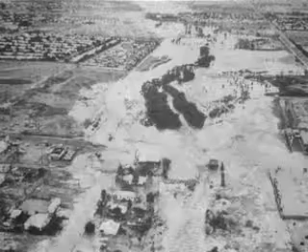In the late 1960s, the Army Corps of Engineers were called in to help mitigate the water issue here in Scottsdale. What they proposed was analogous to the LA River, if you're familiar with that in Los Angeles, the Terminator 2 movies, etc. — a large concrete basin that would run the 22 miles of Scottsdale. Imagine how devastating that would be to the civic environment of the city.

In a kind of incredible moment of enlightenment, the city convinced the Army Corps of Engineers that that was a bad idea and decided that a park would be a better idea. This was one of the first projects of its type in the country — a linear park, an 11-mile linear park, about half the distance.

Scottsdale is a north-south city, a long linear city. This park became an amenity for the city, but it was not just an amenity. As you can see in the image, just below the flood image, is a contemporary flood and how that water is managed. So ostensibly what you have is an amenity that becomes an infrastructure.

This notion of amenity infrastructure is a thread that comes through the work I'm going to show you tonight. Here's a contemporary image of the park, and you can see the variety of different uses that it currently affords.

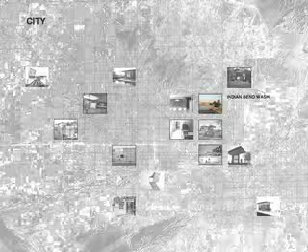So from Indian Bend Park, I'm going to talk about the first project, which is entitled Stripscape. This was a project that was completed in 2004. It's really probably the most intensive project I've ever done. It might not look like much — I'm still a fairly young architect — but let's just say there were 60 presentations given for this project.

The project had a series of stakeholders. This is partly why it was so intensive. The councilman, Phil Gordon, who is now the mayor of Phoenix, was a councilman for the district where we started the project.

In 1998, the 7th Avenue merchants along this north-south corridor formed a merchants association. They came to the city and said, hey, we've got a hardship here — you widened the street in 1965, and our businesses are not doing well. We don't know, you need to do something to help us. We're not sure if we can survive, etc.

And this part of the city was not in any way on the map for the mayor, for any of the municipalities. So the project was a collaboration between these various street departments.

We began — they came to the university at the time, and the city said, could you help us? My research at the time was looking at these commercial corridors as a typology in post-war American cities. I said, sure, that'd be great. Let's try and do this project.

So, of course, I began with a theoretical construct. This image on your right is a picture of 7th Avenue. You can see it's a cacophony of signage and businesses. It's really a 1950s strip, not unlike most commercial strips you see around the country. One of the things that's unique about this strip is that it is predominantly mom and pop shops — except for a Circle K on the corner at the entrance of this one mile stretch, everything else is not a corporation.

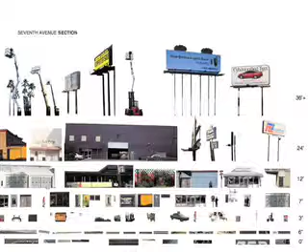The other way was to look at it in section. One of the things we discovered here was that at about 12 to 14 feet, there was a datum that was starting to occur in the site. That datum was really a result of many of these post-war buildings, their type of construction, and where their signage was occurring. So we started to find some threads that began to link this project together.

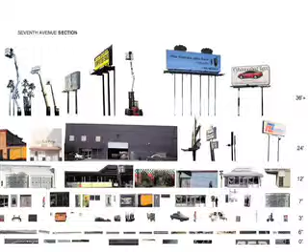So the main thesis, if you will, was to try to take this consumptive landscape and try to make it more productive and more pedestrian friendly, and serve both the merchants and the neighborhood, and really create an identity for the area to help with its revitalization.

So obviously billboards are completely consumptive, and shade is an amenity, and it is really something that's worth something in a city like Phoenix. So the thesis here was, could you turn signage into a shading device? And if you could, what were the possibilities of a city full of shade signs?

And also the visual litter of the site was quite complex, and the idea was to try to reduce that by absorbing car shaded shelters, pedestrian lighting, and signage.

One of the things about Arizona is that the sun, after about 2:30, gets low in the sky, and when it's low in the sky, a horizontal shade isn't going to do anything for you—it's really the vertical shade you have to start thinking about. In fact, it's the most complex situation to deal with in a city like Phoenix because the sun is so hot.

So taking a page from the bus shelters that exist there, these kind of vertical screens, and then monument signage, we started a new public art program that created art panels that could be used to shade areas of the site, but also every 6 months the art changes.

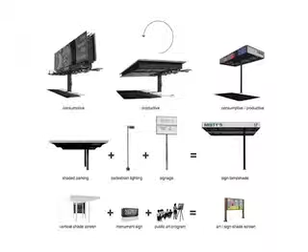Some of the details of the canopy we developed—we call it the lampshade. It's an 8-inch steel pole, just Corten steel. It's rusted, so if it gets tagged, we can brush it. There's a custom aluminum extrusion we designed for the canopy so we could hide all the fasteners, and then an aluminum light box that's cantilevered off of this.

There's an interesting story. When I began the project with the city streets department, the canopies had 4 legs, then at about 60% set they had 3 legs, then 2 legs, then 1 leg. They literally laughed at me when I showed them it only had 1 leg. The intention was to get things out of the way of the automobiles that were there, but also to be as efficient as possible.

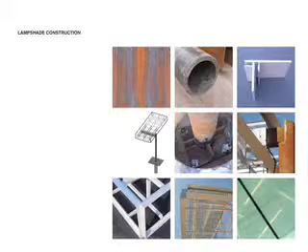So what we did is we convinced the city to build a prototype to test it. My firm was part of a show at the Scottsdale Museum of Contemporary Art called Southwest Net, and as part of the show, we built the prototype.

We're in good company—this is a Will Bruder building, and that glass wall is a prismatic glass wall by Jamie Carpenter. So it was very modest for us to be there, humbling, I should say, to be there.

And so we call it a lampshade. It's a shading device at night—this is an actual bus stop in front of the museum, and at night it illuminates and becomes a lamp.

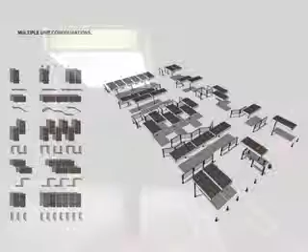So with the multiple unit configurations, you combine the art panels with the lampshades, and you can have everything from a bus shelter to a shaded arcade to a marketplace, et cetera. The idea was that this constellation of pieces could be multiplied throughout the site and begin to create an identity for the area, but also become a programmatic amenity for the merchants.

We took photographs of things we looked at and began to imagine how the merchants could appropriate these for their outdoor display, cafes. There are a lot of automotive mechanics there that deal with classic cars, so how could they display those there?

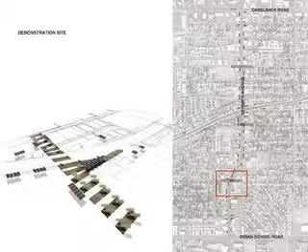We decided that rather than sprinkle the project over the full 1-mile corridor, we would look at just one site and try to have the most impact. And then if that was successful, we would take it north.

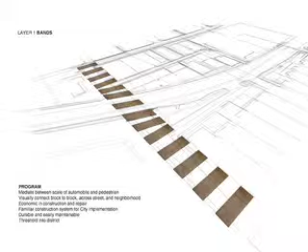The project is composed of a set of elements. The first layer, if you will, are the bands—20-foot by 60-foot concrete, stained concrete bands that come across the street. Scottsdale Road, 7th Avenue is right here, this is Heatherbrae, a cross street into the neighborhoods. So the bands mark the scale of the automobile, and they connect both block to block and across, creating a threshold as you're driving through.

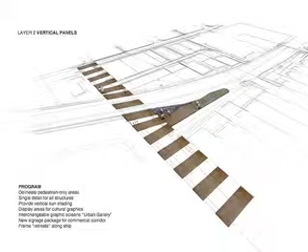The next layer are the vertical panels, or the art panels. These are strategically located to work with bus shelters and outdoor display areas. There was an island here that was part of the city right-of-way that we appropriated—this is due to the surveying of the Jeffersonian grid. There was a shift in that calculation, so we end up with a couple of these things that happen in the city, and we thought that was a good place to begin to demonstrate the project.

This is the project as we built it, and then a set of trees.

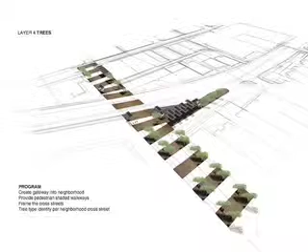The lampshades, I should mention, they're like the tatami mat of the city. They're 9 by 18, 12 feet in the air at that datum line at the bottom. They're 2 feet tall, and garbage trucks are 11 feet, so they don't hit them. But they're arrayed out into the landscape for both automobiles and for pedestrians.

The trees create a gateway into the neighborhood. So here's a before shot.

We worked with a color specialist out of San Diego. The site, all of the buildings were white when we got there, and for these merchants, their building is their biggest sign, and you can imagine the fluorescent colors we were seeing in some places. But the idea was to create a family of colors that would create greater contrast between the buildings, but also allow the building to stand out some more.

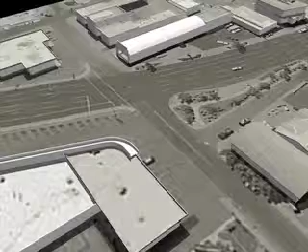You can see there's very little right-of-way moving east to west. You can see on Scottsdale Road, on 7th Avenue, this is the sidewalk, that's the property, and then there's very little parking. So this is the project.

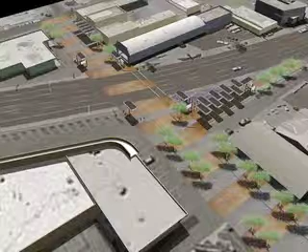If you go to Google Earth, it almost looks like that. It's a little bit frightening. But the project as it exists today looks like this.

The intention was that merchants could then purchase these lampshades. The cost of the lampshade is about $15,000, which might seem like a lot, but the cost for a standard sign that's out there is about $10,000.

Now, if you imagine the lampshade's also a covered parking space, you add that cost into it, and the fact that the city's now made this a standard detail for 7th Avenue, it increases the signage for the business threefold. So we thought that was a pretty good marketing strategy so that the merchants would begin to purchase these.

And it's slowly starting to happen, but the project, I'll explain in a few minutes, we revamped a couple of things. So just to recap, you've got the city investment, the color scheme that was developed for the merchants.

We came up, they named their area Melrose on 7th, not after the TV show, but after the neighborhoods. There are Melrose neighborhoods just to the east and west of the site. We did letterhead, worked with the graphic designer Jennifer Brungart, and made T-shirts.

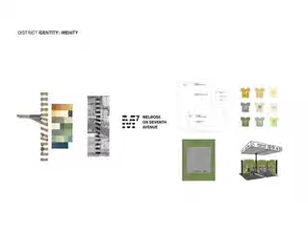One of the things I'll mention is that the graphics, Jennifer did the graphics around the canopies. It's a scan of the leaf pattern of the evergreen elms that we planted in the site, and they subsequently burned. The sun was so intense that they burned the graphics off.

And we realized, I learned a lesson here about these little benches that we put in. The city was like, why do you want to put benches in there? There's no reason. And we said, we just think it would be more humane. And in fact, we got a lot of feedback that just having a bench out there, which sounds a little cliche, but just having a bench out there was really terrific. So I think a lot of these guys might be guys that might have been tagging the place, but now they seem to be enjoying it.

Single pole, double canopy, fewest number of connections. Every connection to the ground is the same. It's a circular steel ring with a pole. The city knows how to put poles in the ground, so I figured, don't fight it.